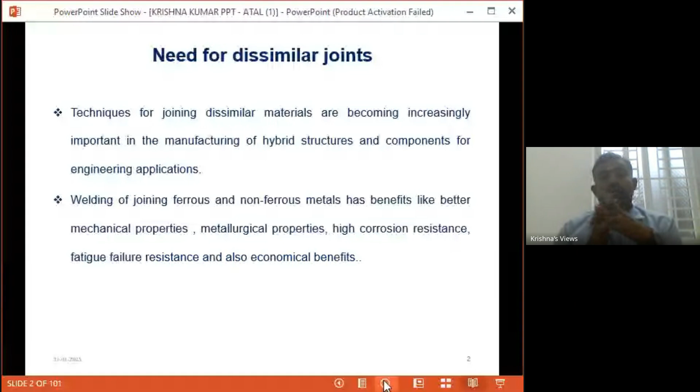Welding or joining ferrous and non-ferrous metals has benefits like better mechanical properties, metallurgical properties, high corrosion resistance, fatigue failure resistance, and importantly in industrial aspects, high economical benefits. These are the things we will discuss. Dissimilar welding is a more challenging task, both technically and scientifically, but it has vast applications in petrochemical, naval, nuclear power generation, automotive, and electric industries.

Dissimilar metal joining, normally called DMJ, is generally used to fulfill the design criterion and strength requirement. Before, we were not able to achieve our requirement given the challenge of doing dissimilar joints, so we went with the former base metals. Now we can achieve our goals as per the design requirement.

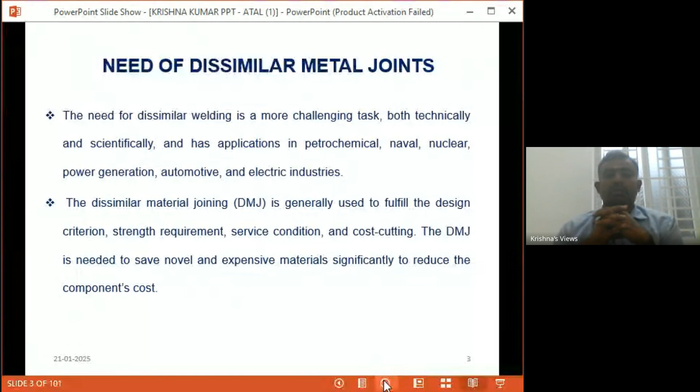Cost cutting also. DMJ is needed to save novel and expensive materials. That means no rare materials; we can avoid rare materials by using dissimilar joints. So by the way, we can save those novel materials, and also cut costs. It's an example from the automotive industry.

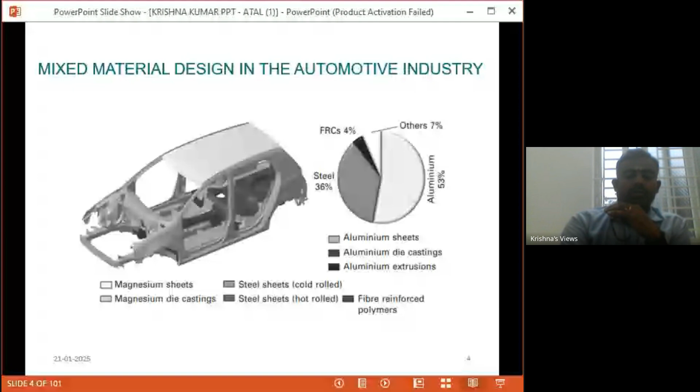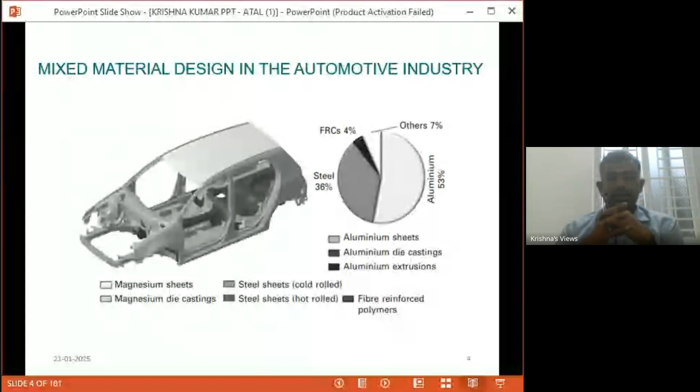An example from the automotive industry, which has more hybrid materials, dissimilar materials in a car body. Aluminum is 53 percent and steel 36 percent, FRCs 4 percent, others 7 percent. So I'm giving some dissimilar joint products, the need of dissimilar joints.

For example, the Honda NSX manufactured with aluminum was 140 kilograms lighter than one manufactured with the equivalent strength and rigidity of steel. So they replaced steel with aluminum, and they reduced 140 kilograms of weight. By reducing the weight, we can achieve more economy as well as mileage. Then here is another part separation.

So this car body has aluminum 6000 series, door inner 5052 and body skeleton 5182. So the utilization of aluminum alloys as a replacement of steel in a body-in-white assembly promises the most weight reduction of 27%. So these are all our design goals.

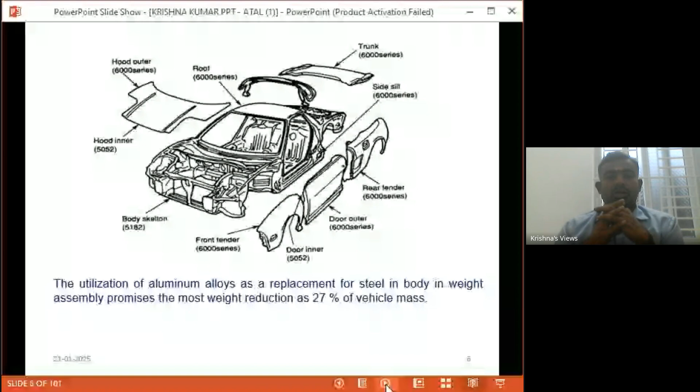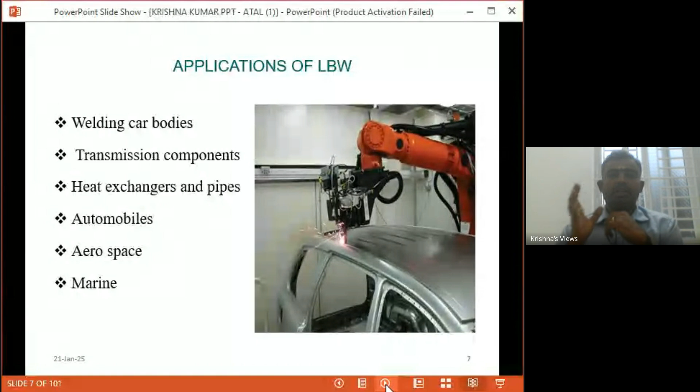But the thing is we can't achieve proper dissimilar joints using conventional methods. So how to achieve strength for the particular part is the challenge. So these are common applications of laser beam welding. We discussed conventional methods; now we are discussing laser beam welding and its application: welding of car bodies, transmission components, heat exchangers and pipes, automobiles, aerospace industry, and marine.

So it's one example for dissimilar joints: nuclear power plant pressurized water reactor, PWR system. Here the system needs an exact, economical, and efficient process. So in order to achieve the efficient process, dissimilar joints are necessary. So here, in heat exchangers, tube and tube sheets are there.

Before, heat exchangers were made of a single material. But by changing the tube sheet and tube materials, we can achieve more efficient heat exchangers. So this is the concept. This is a simple example. Actually, the area is so vast. In fact, we can play with the systems, we can do anything. If you are resourceful, we can do anything technically to achieve dissimilar joints. So the requirement and the scope is vast in this area.

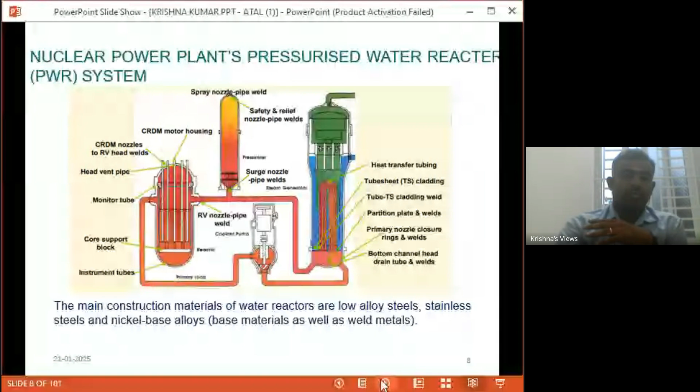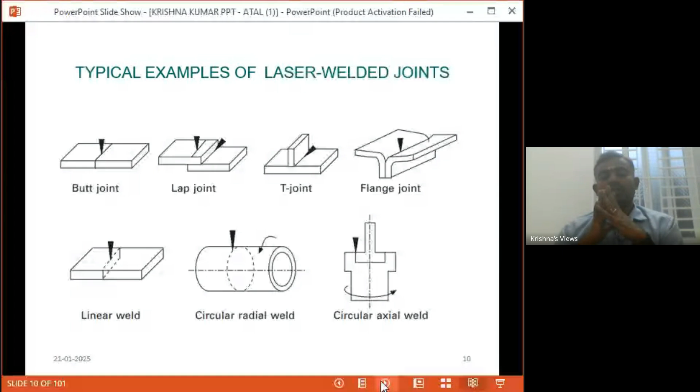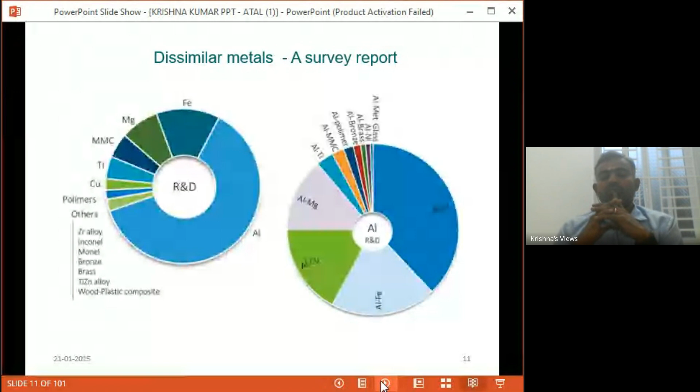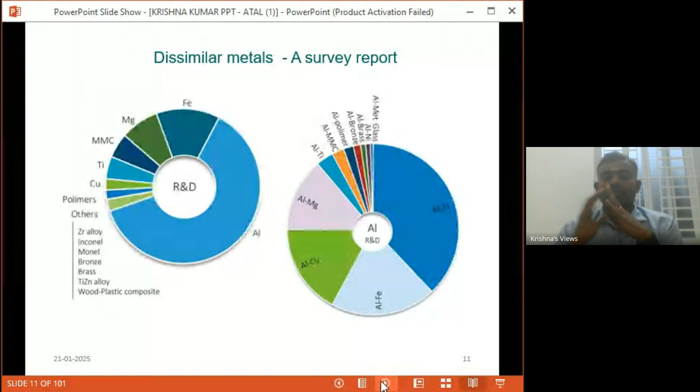So it's a small survey about dissimilar joints. The survey says it's a common research and development area in academia and industry. They are focusing on aluminum, then titanium, copper, other polymers, magnesium, and ferrous are getting their space. In that, aluminum with magnesium, aluminum with copper, aluminum with ferrous, aluminum with aluminum composites, aluminum with titanium. These research processes are done already.

So why laser beam welding? In fact, we can achieve the dissimilar joint by using conventional methods. That is the fact. The goal is, by using laser systems, we can give better strength without changing the base properties. So laser beam welding has high potential in joining dissimilar materials. Laser beam welding is suitable for conductive materials due to concentrated energy for melting.

The laser beam is a non-contact flexible tool. The power intensity distribution can be changed for enhanced productivity, so we can achieve the goal also. Then the main thing is the low heat input provides a narrow heat affected zone, comparing with conventional methods. So, heat affected zone.

While we are making a welding joint, a huge amount of heat is produced. So unnecessarily the base metals change their physical and chemical properties, and we can't achieve proper mechanical and metallurgical properties in the joints. Due to low heat input and the low heat affected zone, it gives better strength compared with conventional joining methods. It's highly possible to join different materials by other methods, but here you can achieve the same without changing the base properties.

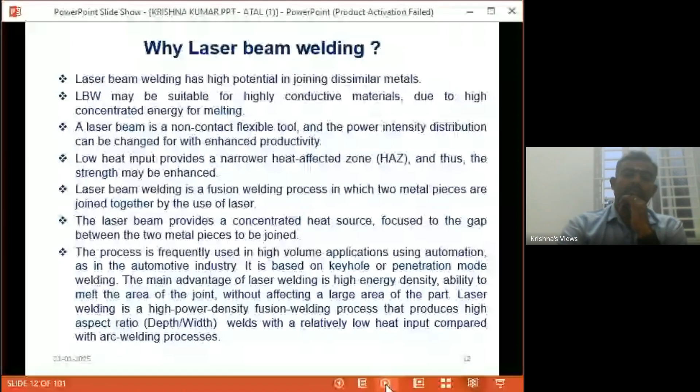Another good example with the laser is that we can join multiple pieces of material. We can't do the same with the conventional method. If we take 1 mm strips, 4 different strips, we can do it in a single stroke without changing the property. Conventional methods won't work for that. With spot welding we can do 2 or 3 strips, depending on the power of the machine and the thickness of the strip. Laser welding is not limited like that. Within the limit of the power, we can do more strips. The penetration will be very deep.

The laser beam produces keyhole mode heat transfer, which enables a very narrow heat affected zone. Due to its high processing speed, dimensional instability is significantly reduced. That's what we need. Laser welding can be performed on very thin sheets and also thick plates. That's another advantage. In conventional methods, welding thin sheets as well as thick plates on a single machine is a challenge. So the process is frequently used in high volume applications. No issues.

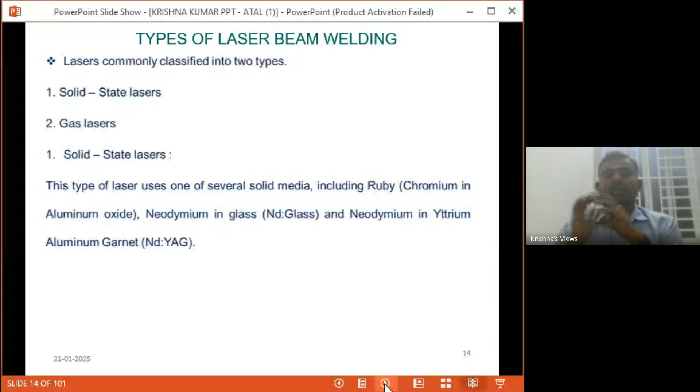Okay, so the types of laser beam welding. There are 2 common types. More types exist, but we classify them into 2: solid state lasers and gas lasers. Solid state lasers use a solid medium: ruby, which is chromium in aluminum oxide; neodymium in glass, which we call Nd glass lasers; and neodymium in yttrium aluminum garnet, Nd:YAG lasers. So we call them Nd lasers and Nd:YAG lasers.

Then the CO2 gas laser. Here, high voltage flows through the tube and reacts with the CO2 gas particles, increasing their energy and in turn producing light. The high voltage flows through the gas particles in the resonator, the gas particles are triggered, and we get increased energy. Then we focus that energy using a mirror and utilize it. The focusing lens is a major part. Positioning the focusing lens on the gap is a setting that takes some time. Once we set that, we can go for mass production.

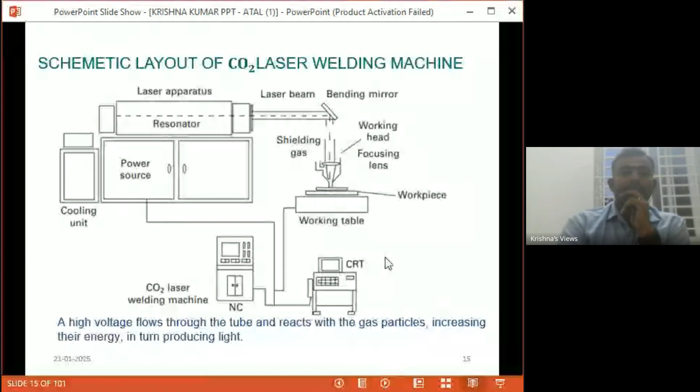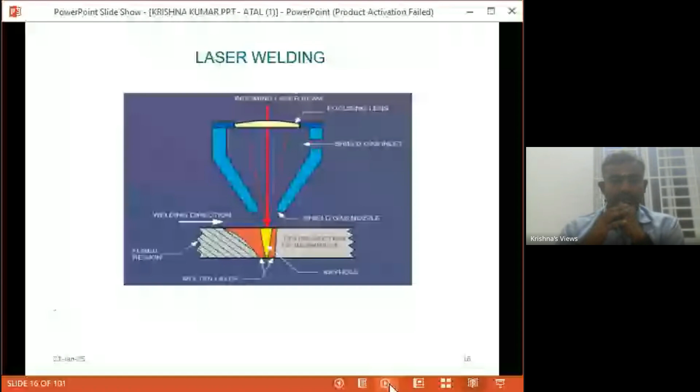So this is the focusing lens. We also use shielding gas: the welding direction, the shielding gas nozzle. That yellow color is the keyhole weld. So this is CO2 laser welding. Why do we go with CO2 laser welding? Because 90% of the process we can do without filler material.

Moreover, CO2 lasers are very powerful. A 5 kilowatt to 10 kilowatt laser will comfortably do 7 mm to 15 mm thickness at the same speed. Up to 15 mm we can do with 5 to 10 kilowatt lasers. But the initial cost is very high, it's in crores. So if our application needs thicker plates, we go for CO2 lasers. If we are only doing plates less than 5 mm or 7 mm, we use Nd:YAG lasers. So this can eliminate the need for V joint preparation.

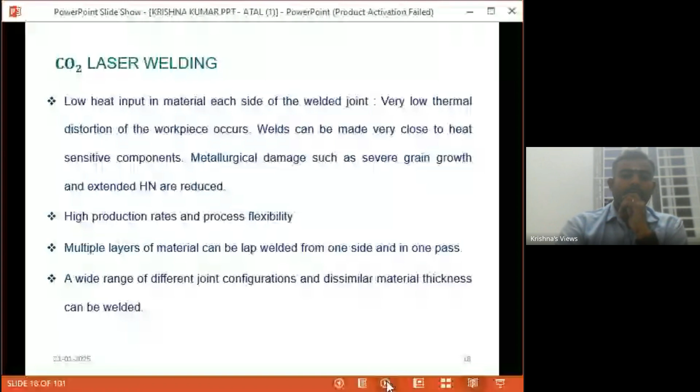So the ability to manufacture a product using a number of different metal alloys greatly increases flexibility in design and production. Your hands are totally freed to design without considering manufacturing struggles, so we can go with better designs. We can achieve 90 percent of the product as per the design. Then properties such as heat, wear, and corrosion resistance can be optimized, so we can get better products.

So joining of dissimilar metal combinations is however a challenging task. Even though, by using CO2 lasers, large differences in the chemical composition can be handled. So laser welding, a high power density but low energy input process, provides solutions to a number of problems commonly encountered with conventional joining techniques. So this is the reason why we have shifted ourselves to lasers and CO2 lasers.

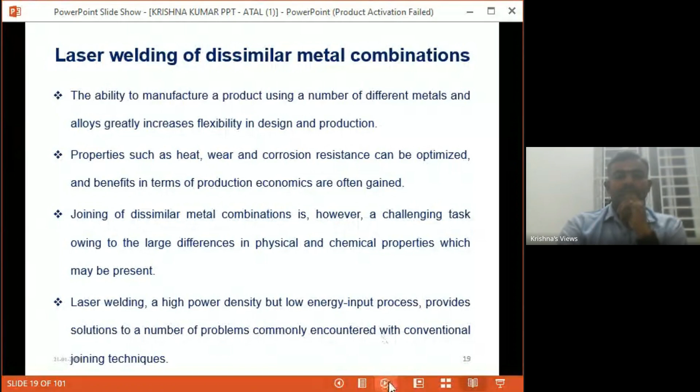So industrial lasers are used for welding, cutting, drilling. These are the normal applications of laser, and surface treatment - in the sense like cladding, applying corrosion resistant material onto another base metal. So for cladding we are doing surface treatment too. In the automotive industry, for example, benefits of laser welding include joining sheet body panels, transmission components, and chassis members that we saw in the pictures.

Now, joints between dissimilar metals are particularly common in components in power generation. So applications are vast. If we are capable of making a highly economical and efficient product using the dissimilar joint, that is a wonderful product. So the application is vast, even in the leading industry - rocketry or aircraft, and nuclear power plant heat exchangers. There are enormous applications.

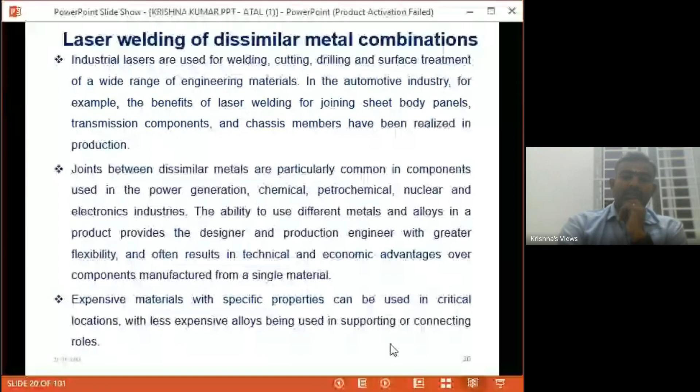Actually, they are facing real challenges now, so laser welding is getting better advantages over conventional methods. Beam energy is deposited on the material surface and transferred into the material by conduction, so a hemispherical shaped weld bead is formed that decides the strength.

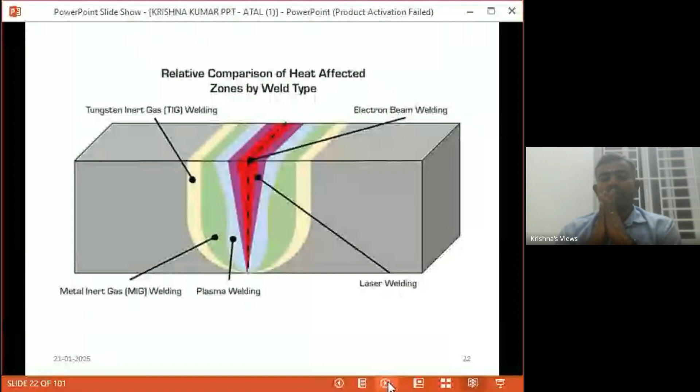So in contrast a minimum power input is sufficient to initiate a local vaporization - heating, then melting, these are all the things needed to join the materials. So we need only a narrow gap, 1 mm or less than that, for CO2 laser.

So it won't affect much in the base metal - it's just keyhole welding. That keyhole is surrounded by a thin layer of molten metal. The keyhole is the joint, then a very thin layer of heat affected zone is there, maintained by the equilibrium between the vapor pressure, surface tension, and hydrostatic pressure. That thin layer is controlled and formed by these forces.

So we are getting a very thin heat affected zone because of the speed and high power. When the workpiece is moved relative to the beam, material at the leading edge is melted and flows around the keyhole, solidifying to form a deep, narrow weld bead geometry with a characteristic chevron pattern on the surface. That is the hemispherical shape, and heat conducted into the surrounding material produces a narrow heat affected zone.

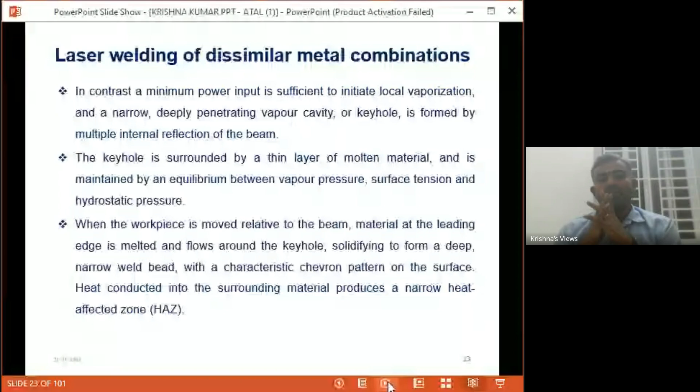So the resulting low energy input produces a small heat affected zone with limited residual stresses. The rapid cooling rate results in the formation of a beneficial fine solidification microstructure and limited heat affected zone grain growth. Then capital cost, as I told earlier, is considerably higher than the conventional arc process, but it can be managed.

By increasing quality and flexibility, achievability is easy, and careful selection and control of process parameters is necessary. As we discussed earlier, the initial setting will take some time, so after setting that, then we'll go for better productivity.

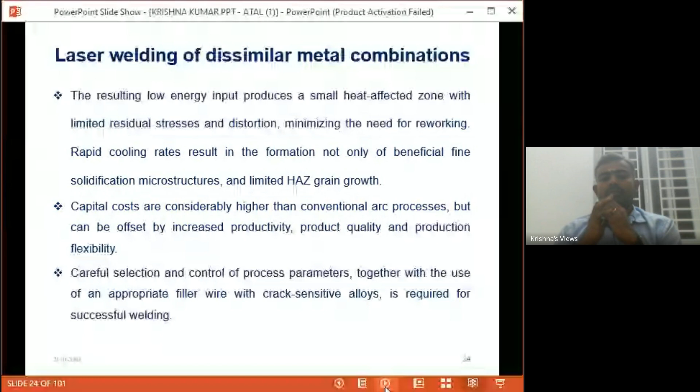Dissimilar metal joints are characterized by compositional gradients and microstructural changes. So the strength of the dissimilar joint we decide by using the mechanical and microstructural changes. So how the physical and chemical properties have changed, or how it is giving better results. That is the success of the dissimilar joint.

That weld quality is dependent on the process variables. A lot of process variables are there, and we can do more and more. Normally in research, we can't take all the process inputs, so as per the priority level, we take the most impactful process input parameters.

If it is necessary, we will introduce filler materials. We will consider whether it's possible to achieve joining of these two materials, and if not, we go for making specialized filler materials and use them. Somewhere people are using metal foils, metal powders, composite metal powders, special metal layers, then fillers. Anything we can do. Somewhere they are preheating everything, even in CO2 laser, preheating within the laser itself. So we can achieve it, if you have the capability and resources. We can do much on dissimilar joints using especially lasers, CO2 or Nd:YAG.

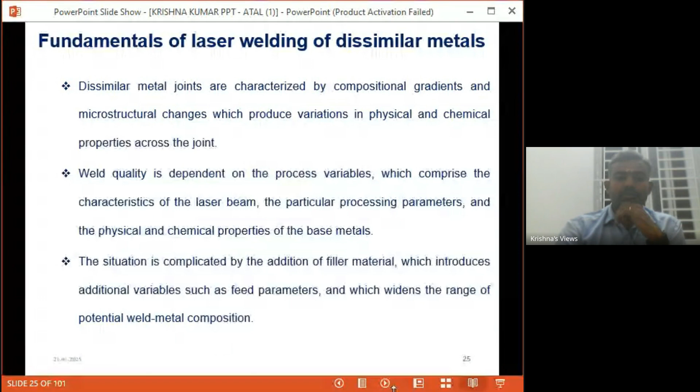So the principal physical properties are conductivity, absorbability, density, specific heat capacity, thermal expansion coefficient, and melting temperature. These are all the basic material properties. If we are going for dissimilar joints, we should consider the physical properties of these base metals: thermal conductivity, absorbability, density, specific heat capacity, thermal expansion, and melting temperature. These are the major things we should consider before going for the dissimilar joint.

If there is any deviation of much more than 10 or 15 percent, we should face problems in that area, so problems will be generated in that scope. After a trial, we should look for a better option. Even we can use filler materials, preheating, or change the input process parameters. So anything we can do, but we should note all these physical properties of the base metals before proceeding.

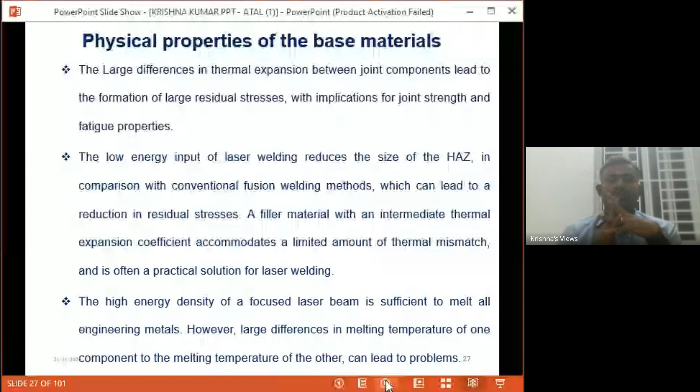So we move on to chemical properties - chemical mismatches, that is the percentage of components. Percentage of components is also an important part. So before selecting the base metal, before going for the CO2 or laser dissimilar joint, we should consider the physical properties as well as the chemical properties. The compositions should be close to each other.

For example, if one base metal has magnesium at 2 percent or 4 percent, the other base metal should at least have magnesium too. The chemical component should mix up well with the other base metal's chemical combination for this to happen, otherwise it will disturb the strength. So they should mix up well to form a better microstructure.

That is why we are considering the mechanical properties, which depend on the relative atomic size, crystal structure, and relative valency. We should consider not only the physical and chemical percentage, but the percentage of components should also be considered. If it is nearly close, or can mix up well to form better strength, then we can choose two different materials.

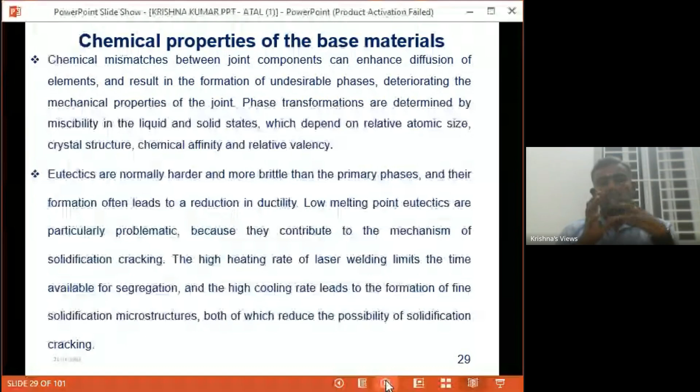Now we are going to see about some dissimilar joint compositions: stainless steel and low alloy steels. Joints between austenitic stainless steel and carbon or low alloy ferritic steels are required in many sectors of the industry, to satisfy performance and economic criteria.

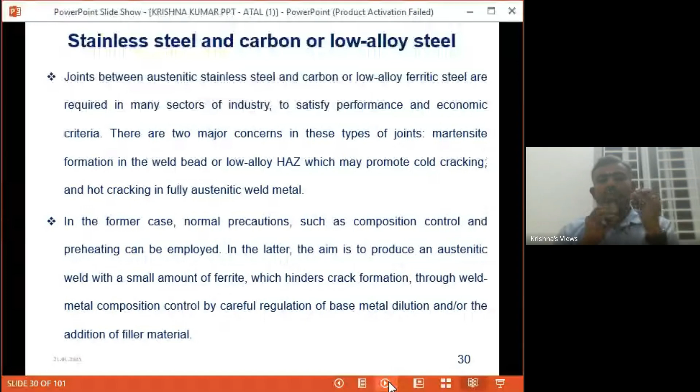There are two major concerns in these types of joints: martensite formation in the weld bead or low alloy heat affected zone, which may promote cold cracking, and hot cracking in fully austenitic weld metal. In the former case, normal precautions such as composition control and preheating can be employed before execution of the joints. In the latter case, the aim is to produce an austenitic weld with a small amount of ferrite, which hinders crack formation through weld metal composition.

This is controlled by careful regulation of the base metal dilution. So this is our requirement to get better strength while joining stainless steel with normal low alloy steels.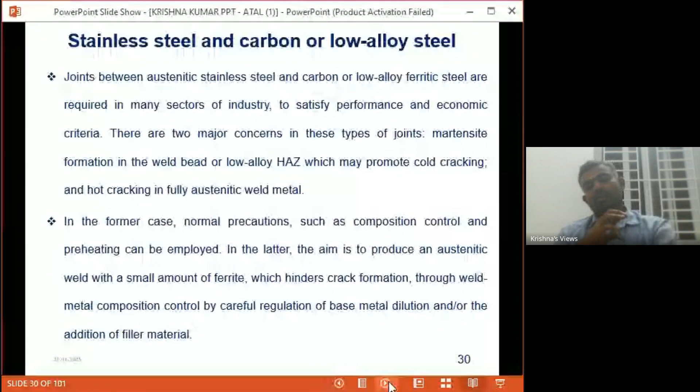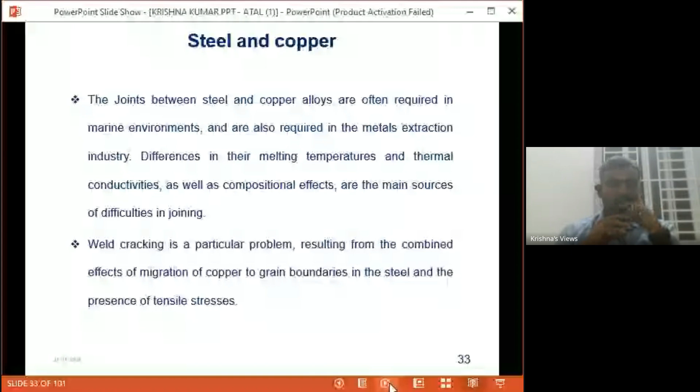Now steel with copper. What should we consider to join steel and copper? The joints between steel and copper alloys are often required in marine environment applications, and also in the metal extraction industry. The difference in melting temperature is nearly 400-450 degrees Celsius. This difference in melting temperature and thermal conductivities, as well as compositional effects, are the main sources of difficulty in joining. Weld cracking is a particular problem resulting from the combined effects of migration of copper to grain boundaries in the steel and the presence of tensile stress. These are all the challenges to join steel and copper.

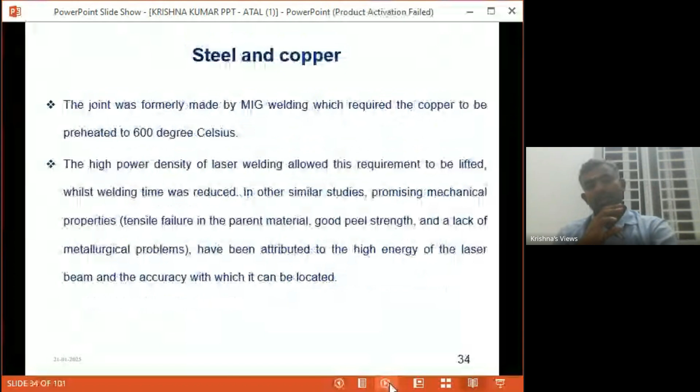Steel and aluminum: the joints between aluminum and various types of steels are particularly important in cryogenic applications. Storage tanks are made from aluminum alloys, but the transfer lines from the storage tank to the medium transfer pipelines are made up of stainless steel or low alloy steels. For the reason of higher strength, we can't make the complete structure with aluminum alone, either steel. So there is a challenge of joining steel with aluminum.

This is due to the reason of strength, control of heat flow, and to enable the attachment of valves and bolts - those parts can only be done with stainless steel, not aluminum. So there is a necessity of steel and aluminum joints. The proximity of the vaporization temperature of aluminum and the melting temperature of steel leads to formation of brittle intermetallic compounds, causing failure of the joint. The large difference in thermal conductivity creates problems when attempting to produce such joints by fusion welding, so solid state processes are normally used in such applications.

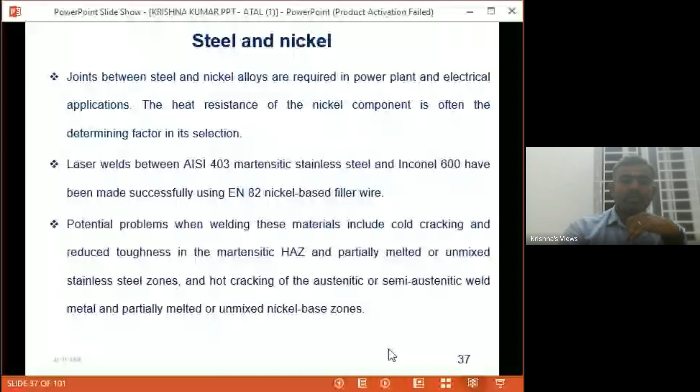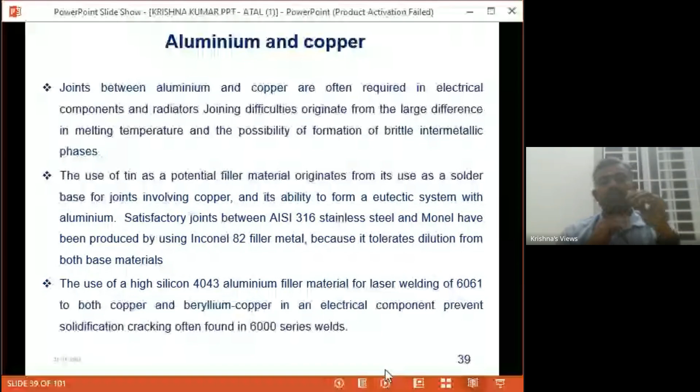So these are all the problems and how they are overcome by using conventional methods is explained here. So this is the total. Here, before, many researchers have joined two different base metals, and how the results came. So the total tabular column is here, so you can use it for comparison.

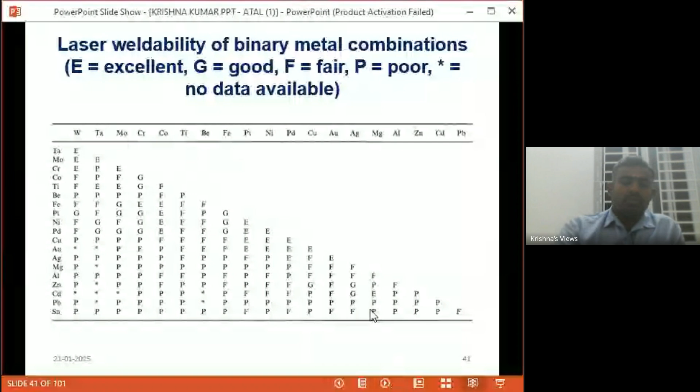So there are some excellent joints, good joints, fair and poor, and then no data available also. No data available means that maybe the application may not be available, and more vast research may be needed. So these are all the small combinations of different materials. So another material selection. In the previous slide we just saw whether it is possible or not, how fair the joint is.

So here, what problem will occur when we join different materials. If we go for aluminum and silver, then complex structures may exist. These are already research done using the conventional method. So we take it as a challenge and a necessity to achieve with our latest lasers. In that sense, after the trial, we should consider these results and do the necessary things to achieve better joints.

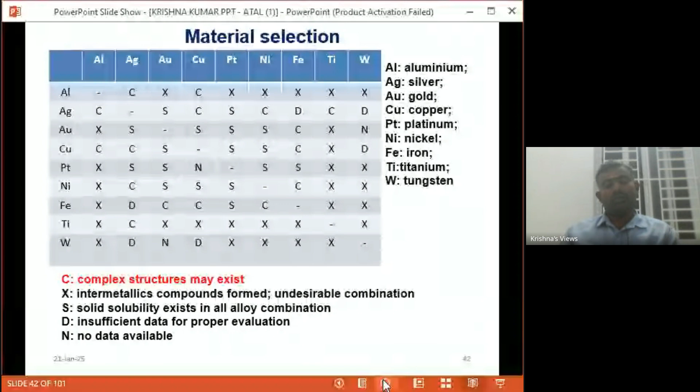So some combinations are very useful ones. Complex structures may exist. Then some intermetallic compounds are formed. So they may need preheating. So precautions we should take. As we go for a trial, if it is not okay, then we do preheating. Like that, we should do some actions before execution.

There are some examples: aluminum, copper, iron, and titanium. Coefficient of thermal expansion of aluminum is 23.5, copper 17, iron 12.1, then titanium 8.9. So those values should be nearer. Actually, this is for research purposes, but if the necessity is there or we go for R&D, then we consider this. These are all the weaker points for the joints. So we should take all those physical properties, and if failure occurs, we go for the remedy.

So, as we discussed earlier, the input and output parameters of welding also play a very big role, even after considering all those physical and chemical properties. The major input parameters are laser power, welding speed, focal position. It's all about the CO2 laser. The focal position, beam offset, beam angle, shielding gas, flow rate. These are all the input parameters.

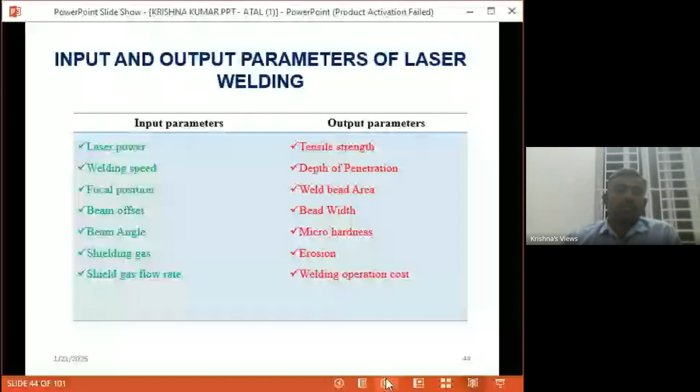Then we have some output parameters to measure the strength: tensile strength, depth of penetration, weld bead area, bead width, micro hardness, erosion, then welding operation cost. These are the output parameters against the input parameters. We should be satisfied with those output parameters based on the requirement. If we need to consider welding operation cost with more priority, we take it. Then depth of penetration, hardness, erosion. If erosion is needed, we make joints and go for erosion testing.

So the laser nozzle, then wire feeder. If there is a wire feeder, then the wire feeder angle will be there. Then wire feed speed is there. We can take those as input parameters. Then laser beam focal position, the position angle, power. So there are a lot of input parameters. I just give some as an example.

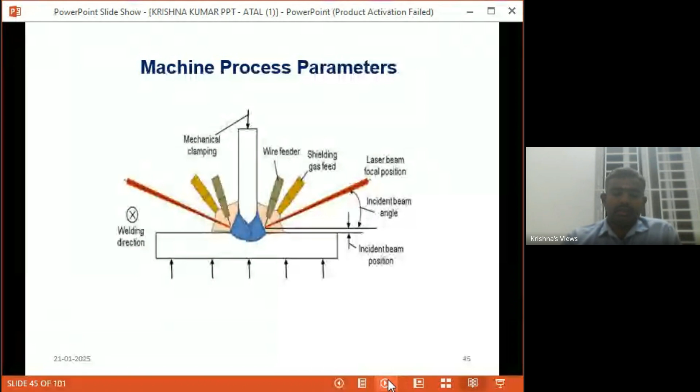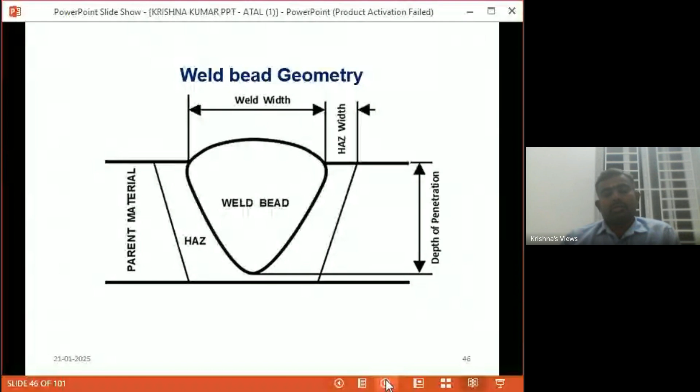So it's weld bead geometry: weld width, heat affected zone, depth of penetration. These are all the output measures to judge the strength of the joint. We should measure the microstructure. By using the microstructure we measure all those things, do calculations for better strength, and measure the weld bead geometry.

Nickel is used for the whole heat exchangers. So there is no need to make the high cost material to produce the full heat exchanger as a single material. So if it is possible to do a better joint of pure nickel with stainless steel, we go for stainless. Stainless steel is highly economic; it has a better price when compared with nickel. The main thing we are using nickel for is the thermal conductivity, heat conductivity.

So the main core is the tubes. You can see now the tubes. Those tubes we can make with nickel. So if we are capable of achieving a better joint with nickel and stainless steel, we can do a joint of that nickel tube with the tube sheets. By the way, we can do better cost cutting and good efficiency of that heat exchanger. So that is the major application for pure nickel with 316.

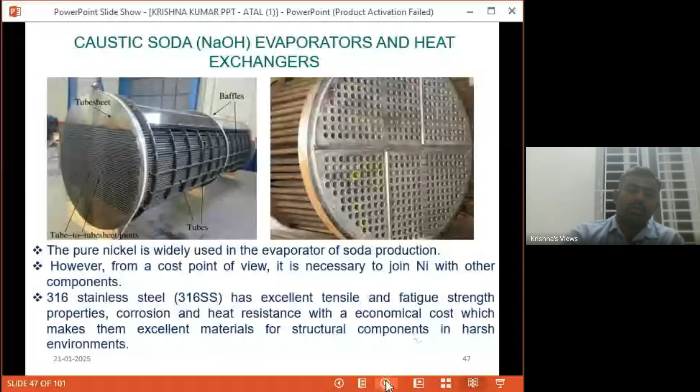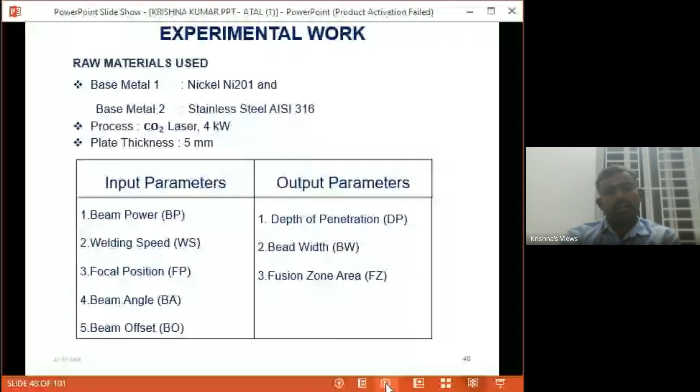So by considering that application, I wanted to achieve it. That is the most wanted joint, nickel alloys with stainless steel. A better joint of dissimilar materials is the recent trend. We can't make the nickel alloys as per our own compositions, so I used what is available openly. The application is there, so we go with it. If you go for your own compositions of nickel alloys, problems may arise unexpectedly. So go with the available one.

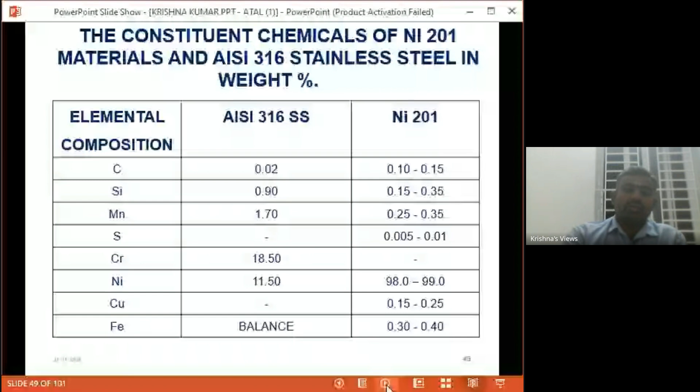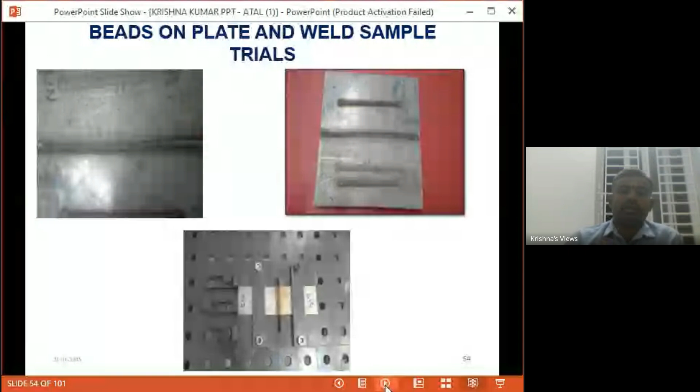First, it's a Trumpf laser cell, TLC 1005, 4 kilowatt CO2 laser. These are trial runs. As I told before, when going for new things, we do trials to set the input parameters. It's a new one for the machine side also, so we should finalize the upper and lower limits. Then a number of trials were done and we were not able to get the proper joint.

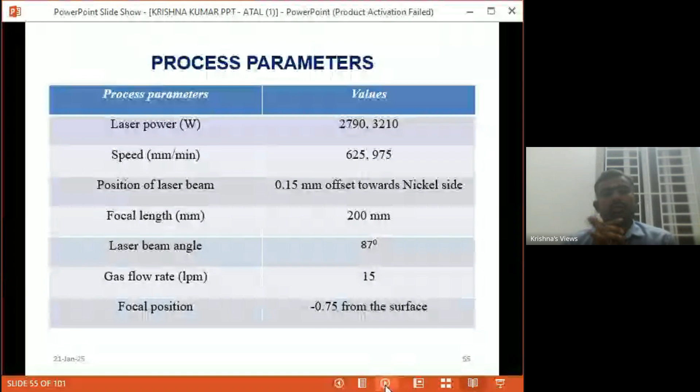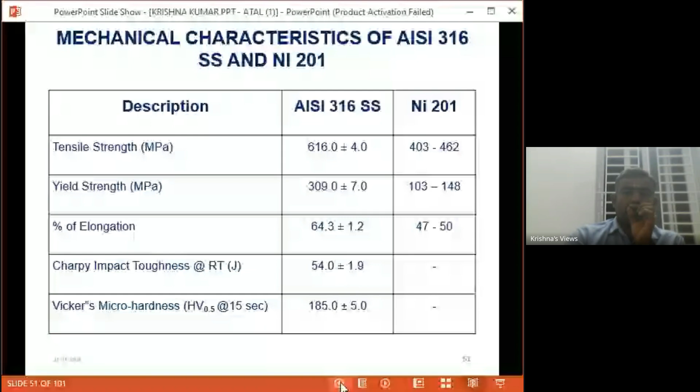So after getting some references, I got the point of the third one, the position of laser beam. The position of laser beam is 0.15. It is not in the gap between the two materials; I concentrated on the nickel side, just 0.15 mm towards nickel. First, nickel starts melting. Why? Because the melting point of nickel is quite high, nearly 1400 plus. And thermal conductivity is much higher in nickel when compared with 316.

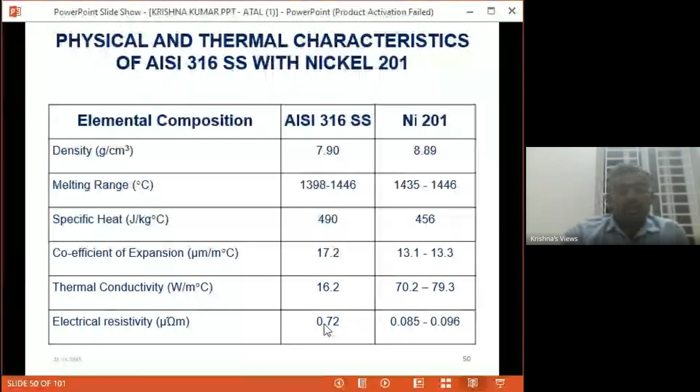For that thermal conductivity reason, they used nickel as a tube, otherwise the whole heat exchanger would be made of nickel. It's 70, a major difference: thermal conductivity is 16 versus 70. So after more trials, we moved the laser concentration to the nickel side first. Then it's okay. Then the laser beam angle: we were not able to get it at 80, 90 because of reflectivity, so we could not transfer the energy properly.

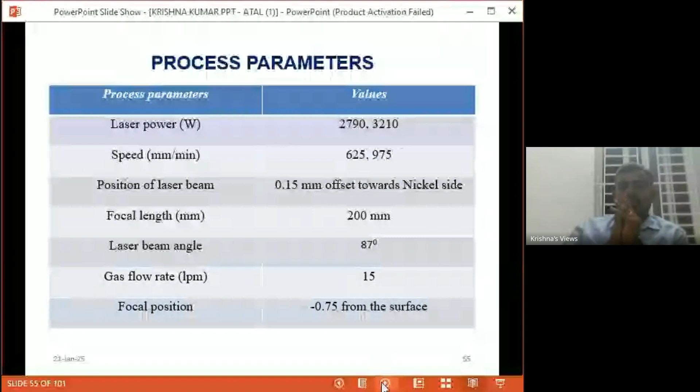Then again the focal position. Normally in lasers they set it at 0, on the surface, but here, after more trial runs, we set it at minus 0.75 from the surface. That way we get equal penetration. If one side gets more molten pool and the other side is solid, it is totally not helpful. So these are all the things for the initial stage. It was a struggle for some time.

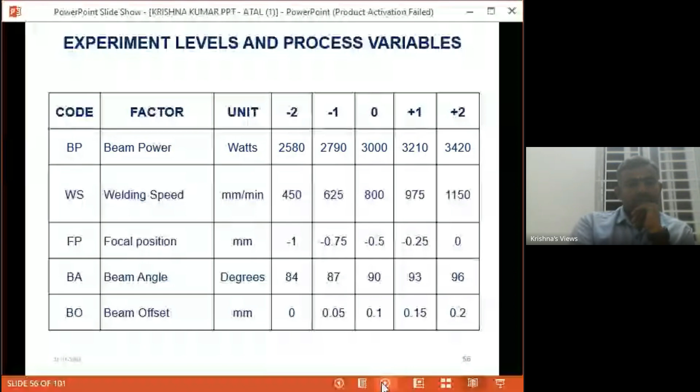So type of variables for better strength. So for optimization and the process trials, 5 level process optimization. Then we done tensile, impact testing, bending testing. These are all the mechanical properties to judge the strength. So we done as per the standards. So for tensile,

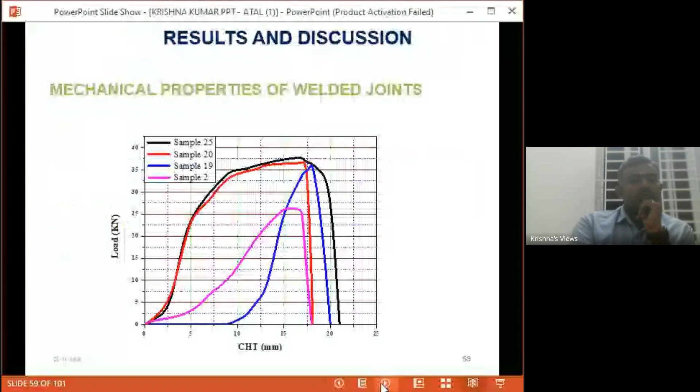then comparison of tensile, we just compared the tensile strength of the dissimilar joints with the base metal. So we received the failure. We got the failure at the nickel joint. So definitely options are there. So definitely we may conduct preheating or we use better fillers. If it is possible to do with the same process means achievable. So it's highly achievable to get a better strength.

We may get a failure at the SS side. So we got a failure in the nickel side. Actually, before that, we do more combinations with more materials: nickel with aluminum, MS with copper, copper with nickel, then MS with nickel. So we do things, but it take more economically, it's much cost. So finally, we decided with this.

And the micro uncertainties in the microstructures we found a lot in those materials, aluminum with nickel, nickel with the copper, and we can't able to find the proper application in that area. So it's a strong application of nickel alloys and normal steels. We have better applications there. So it's a sample of the weld. There's a failure in the weld, then closer to nickel and the parent material nickel. So 412. It's a good one.

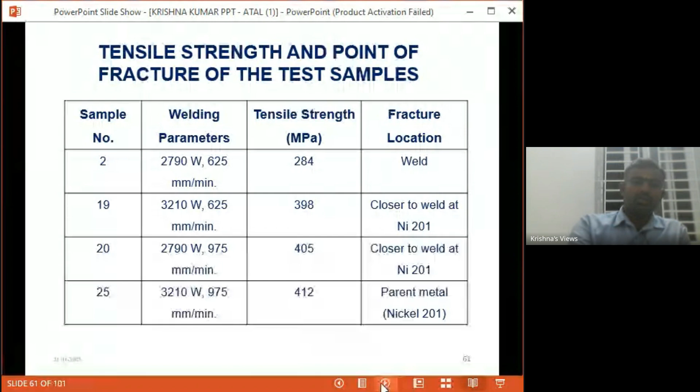So it's not necessary. It's really quite complicated to get the achievement in the dissimilar joint. But normally, experts are saying that you can't expect the failure in the dissimilar joint in the base metals. If you are receiving the same, it's much better. But at least your weld strength should be more than 75 percentage of any one of the base metal. So that is okay. If you are getting the tensile value of the joint as 75 percentage and more of any one of the base metal, then the joint will be good. So that is the thing.

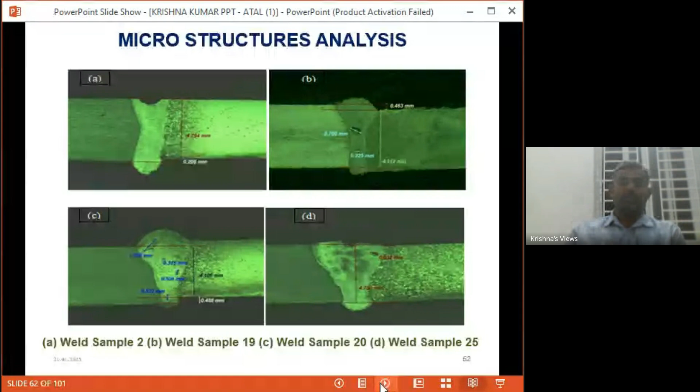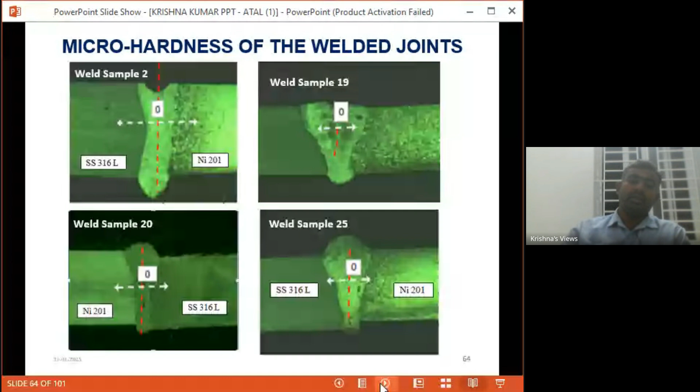Then impact toughness. It's a measurement. So, macro structure, we measured it and calculated the weld area. Then measurement of microstructure. Micro hardness, same. In weld area, quite high. This formation of graph should be expected. So it depends on the left side and right side. On the left side I measured the stainless steel. Then it's a weld area. So the graph comes like this. While in the heat affected zone, it's quite high. Then in the center of the base metal, I started from here. Then closer to the center of the weld bead, then it's gone down to the base metal hardness.

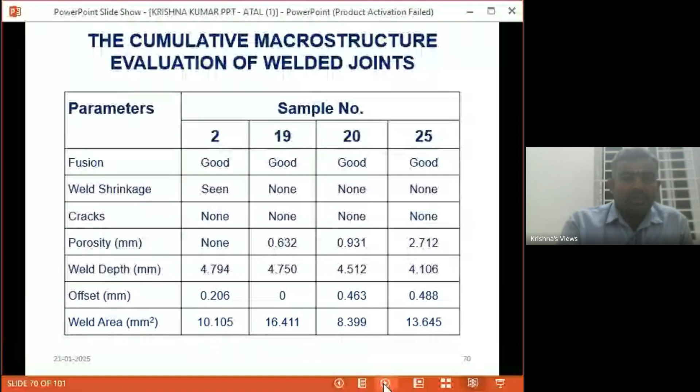Microstructure, macrostructure. So in macrostructure, usually you can find the issues, how the fusion is there, is there any weld shrinkage or cracks inside the depth, then offset, then how the weld area is. So porosity is there. That porosity should be in a limit. If there is more porosity, that too leads to joint failure. If there is more porosity, the reason may be more speed. So if you are seeing more porosity in all the trials, nearly done 30, 40 plus, then we should control the speed.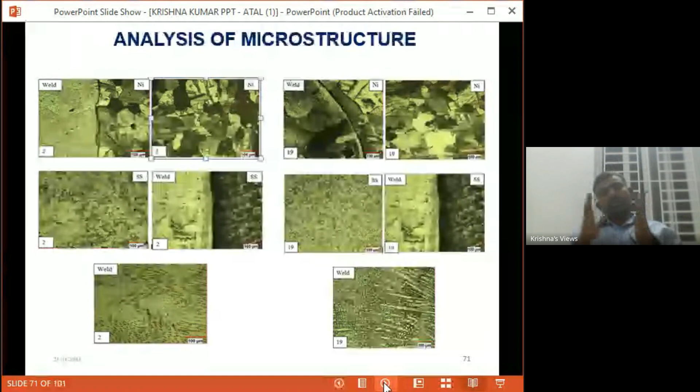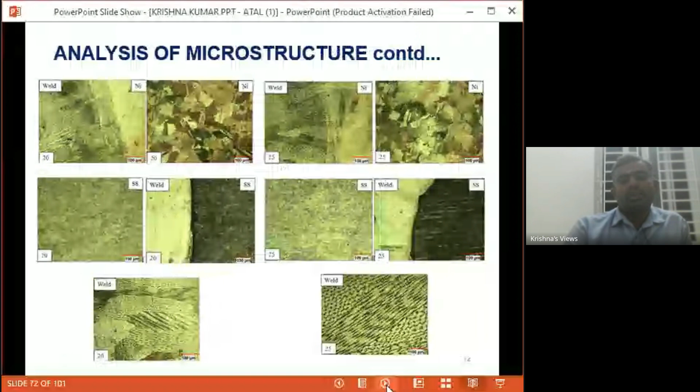So it's a mix up. No, it's a joint. It's a joint: base metal, weld and nickel side. So this picture is pure nickel base side. Then for another sample, weld and nickel side. Then mix up should be there. So if it is a proper mix up, then we are good. If there are some improper mixtures there, we'll see the failure in the weld itself. So we are expecting proper mixture. So it's another one. So it's the trials.

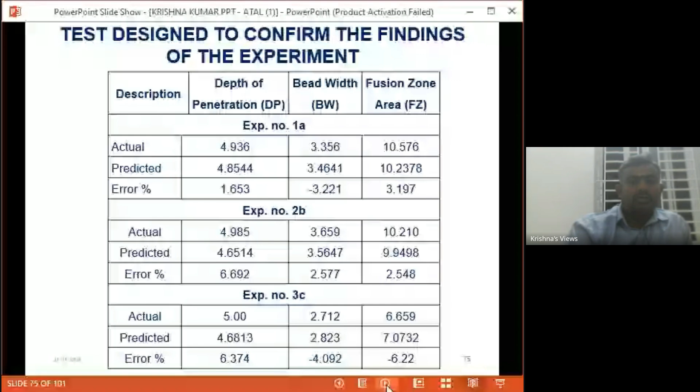So the optimization, the model validation. So actual versus prediction. We will predict, and there will be error. So error should be in a limit, right? And by optimization, we can compare the process input parameters, how the penetration or bead width or depth is getting changed depending on the input parameters of power, laser speed, how it is varying. So by the way, we can adjust the things without doing more trials. That's the objective of optimization. So by using this, we can find the most impactful process parameters, which are playing the major role. So the same, response plots.

So this is the thing. Beam power. What is for optimization? What do we need? Beam power should be minimized. Welding speed should be maximized for more production. Beam power should be minimized to reduce the economic cost. And focal position should be in range.

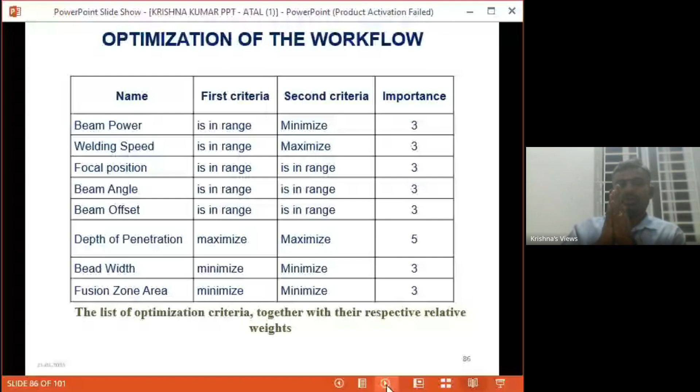Beam angle should be in range, which we found. And beam offset also. And depth of penetration should be maximum, the full. Then bead width should be minimum. Then focal, no, sorry, fusion zone area should be minimum. If it is maximum, then more affection of base metal. So it's an area measurement, fusion zone.

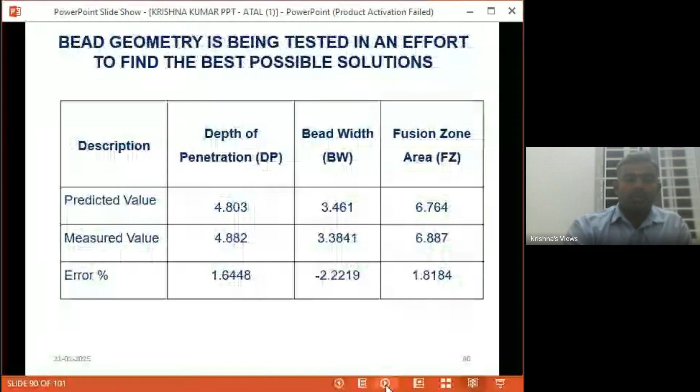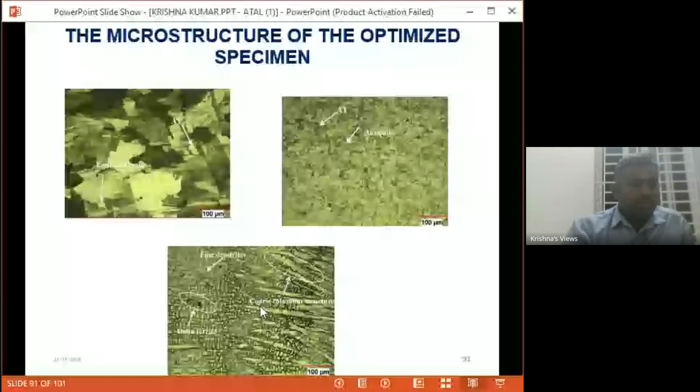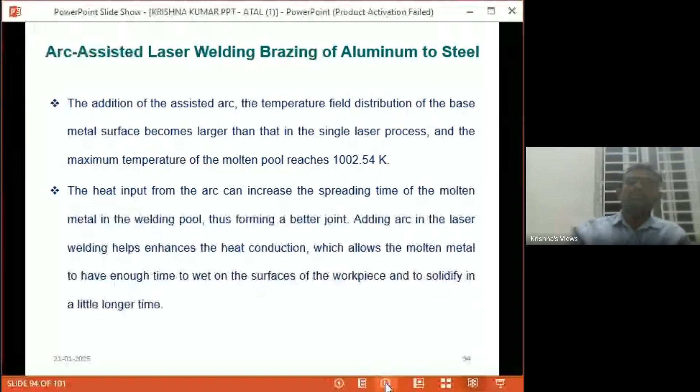So preheating or post heating, both we can try, which depends on the failure, the material. We try both. It's all trials now. So it's called arc assisted laser welding-brazing of aluminum to steel. With the assisted arc, the temperature field distribution of the base metal surface becomes larger than the single laser process, and the maximum temperature of the molten pool rises. The heat input from the arc can increase the spread time of the molten metal in the welding pool. That helps us.

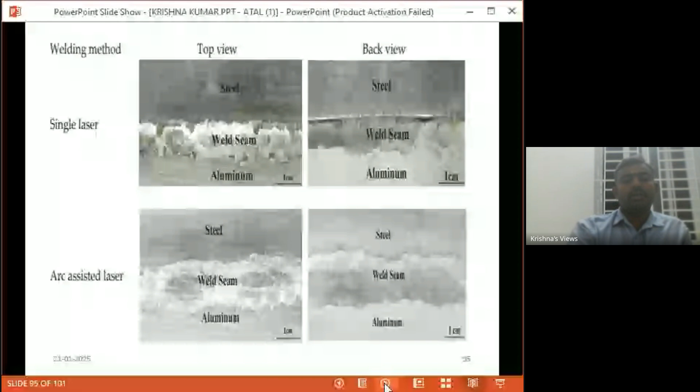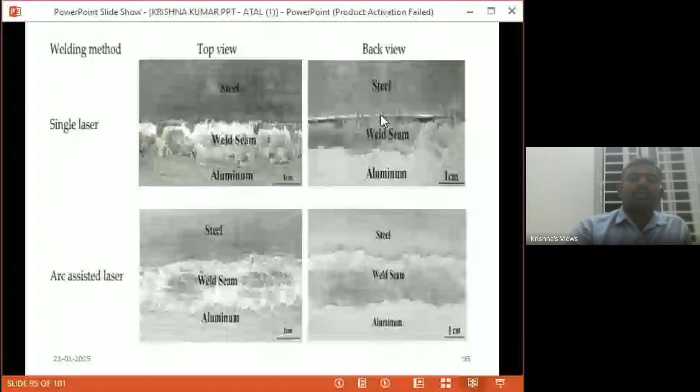This is a comparison of single laser and arc assisted laser. Visually we can see there is a problem with the weld seam. Here is a better mixture of dissimilar joints with the steel. The weld pool is now equal, the elliptic thermal view is equal. Then arc assisted laser is giving more strength, 1.3 times that of single laser. So a small setup of preheating or post heating may give very good results.

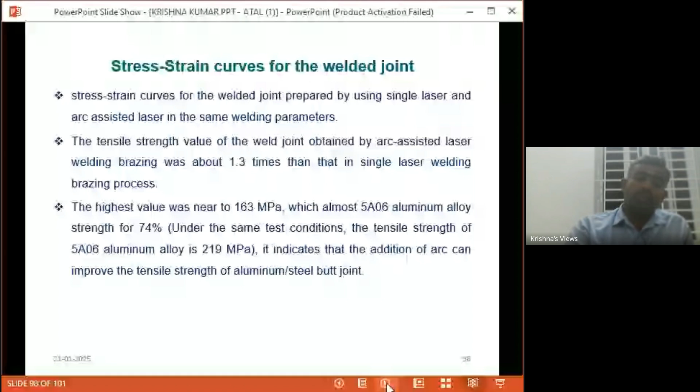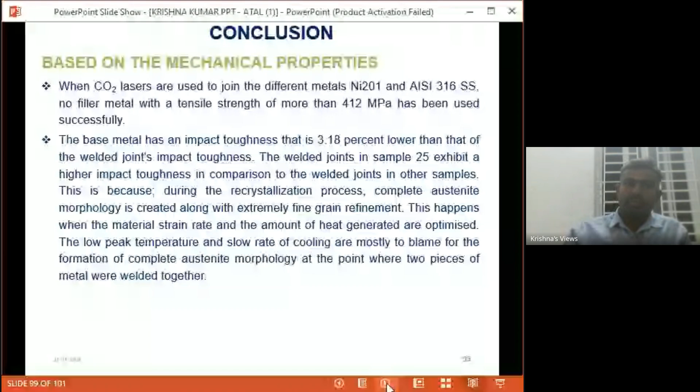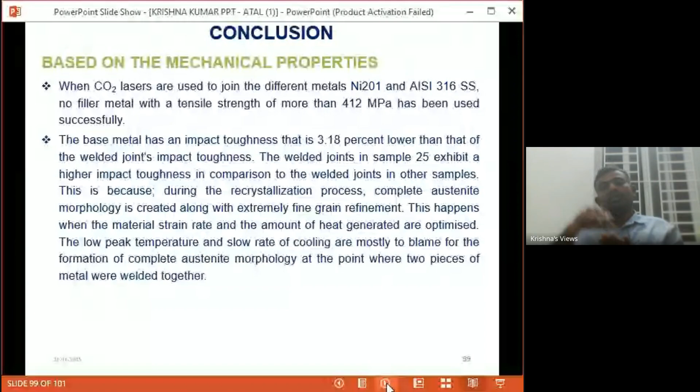Then in conclusion, lasers are used in different metals, Ni201 and 316. No fillers were used in that. So we can try with filler, preheating or post heating, or foils. I tried with nickel powder. Nickel powder or filler may give a better alloy. So anything we can try to get better results. It's highly possible. It's basic research, but if you are doing filler material, foils, powders or preheating, we can do better.

So there is a vast research area in dissimilar joints. I'm not saying only CO2 or normal lasers can do dissimilar joints, but lasers support the main backbone of the strength of the joint, the heat affected zone. That's why I'm saying lasers are better, not only CO2. If we're going for thick plates up to 25 mm or thick pipes, go for CO2, or even lesser thickness. So lasers give the first main thing.

Then what is next? How are we going to manage the difference in physical and chemical properties, the different metal compositions? What type of filler can we use to compensate the material differences? These are the things we should consider for the research. This session is only 1% of the information. There are a lot of opportunities.